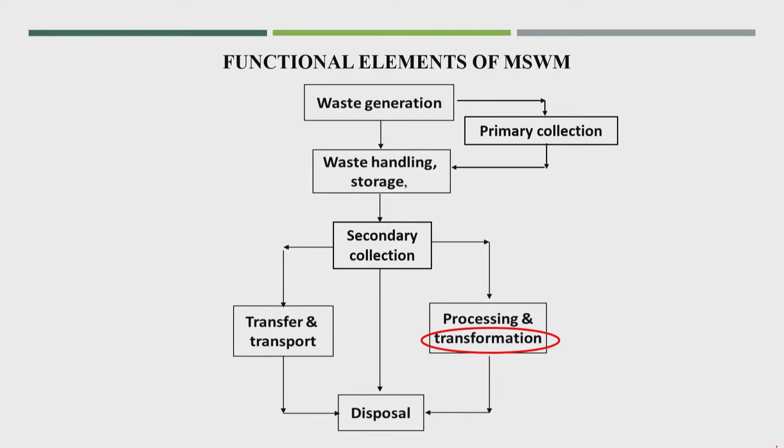Hello student, we are at module 8, chemical transformation, the fifth functional element. In the previous class I talked about whether waste could be useful as fuel, depending on different parameters, especially calorific value.

Today we will talk about incineration, a proper combustion process. Incineration is a waste treatment process that involves combustion of waste at very high temperature in the presence of oxygen. We can call it combustion also. It results in the production of ash, a solid residue produced after combustion. Flue gases are also produced, which are very polluted gases, and along with that, heat also gets produced from the incineration process.

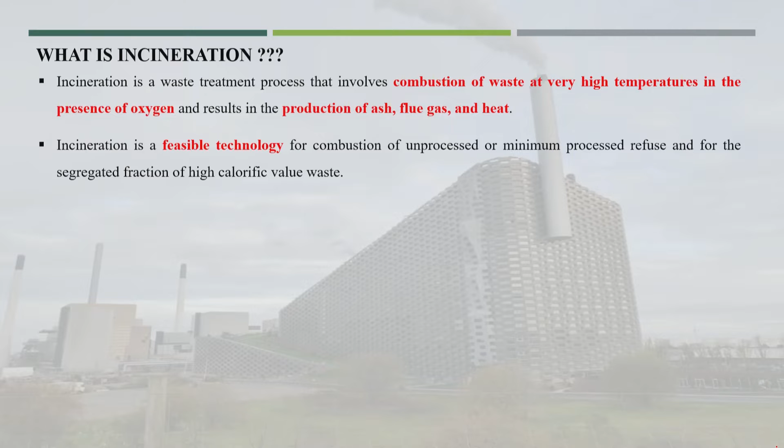Incineration is a feasible technology for combustion of segregated waste, as I told in the previous class. If waste is segregated at source, the dry percentage is very good for incineration, especially paper and plastic, which are highly combustible and have very high calorific value. This is one of the best technologies to reduce volume, because the ash produced is very low, maximum 5 to 10%. So volume reduction of 90 to 95% is possible with this technology.

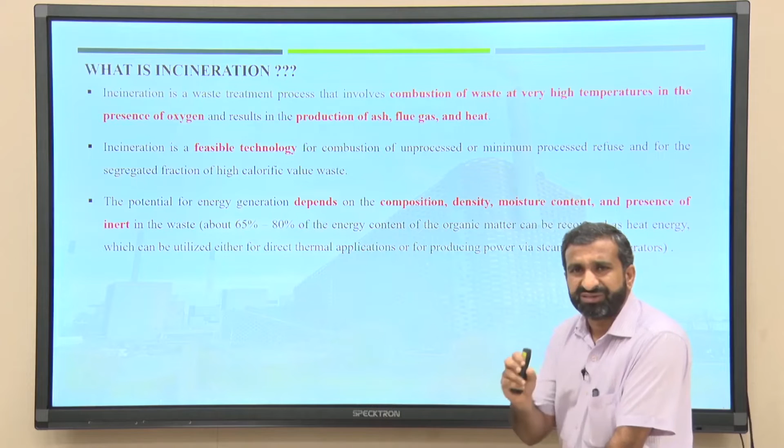The potential for energy generation, because the heat can be converted into power, depends on composition, density, moisture content and other parameters, especially volatile solids. If more organic content or volatile solids are present, energy production will be very high. About 65 to 80% of the energy content of organic matter can be recovered as heat energy from the incineration process, which can directly be used as thermal application for producing power via steam turbine generators.

So I will talk about that. We will get three different products: heat will be the first product, from that we can produce steam, and from that we can produce power.

As I was talking about, incineration helps reduce landfill volume. The volume reduction is more in this case, so whatever waste reaches the disposal or landfill site, that landfill site can work for a longer time.

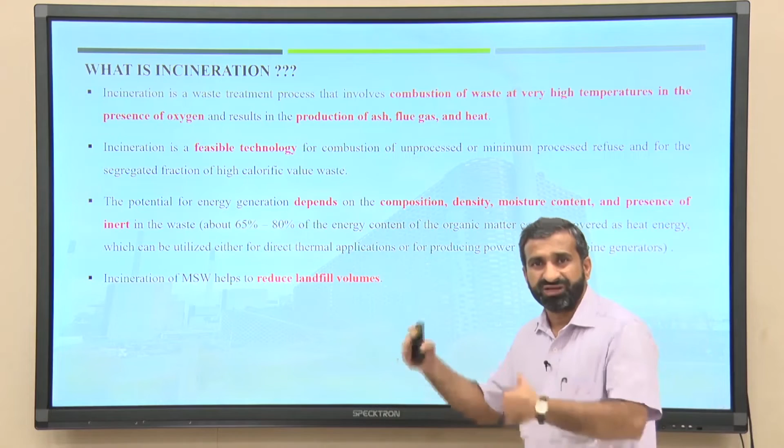Incineration is feasible when there are no better options for processing waste, or there is a shortage of land for landfilling. This is a very important point. If there is no better option available... what could be the better option for dry, combustible waste? The better option is recycling, which we talked about in the last module. Recycling is better because there's no need to worry about flue gas or ash production, and we don't need much energy. There's no need for the very high temperature combustion process required in incineration. Reuse could also be a better option for some materials.

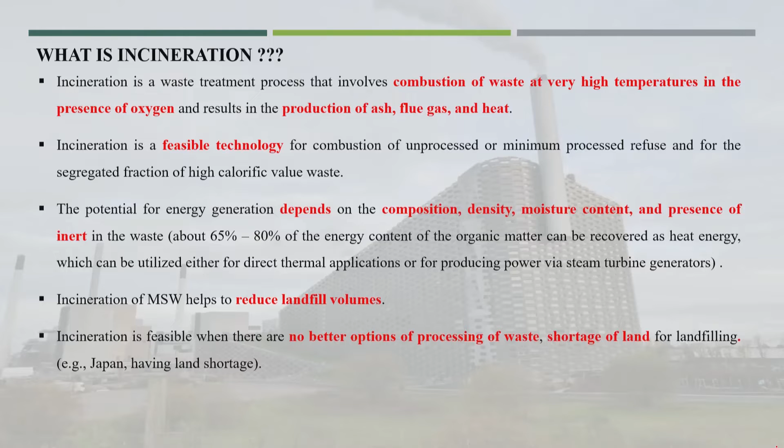If those kinds of options are not available, then incineration is one of the very important technologies or better options, especially where there is a shortage of land. For example, Japan is a very small country with very low land availability. Such countries cannot depend on landfilling for this kind of waste, so this technology is a better option for such countries.

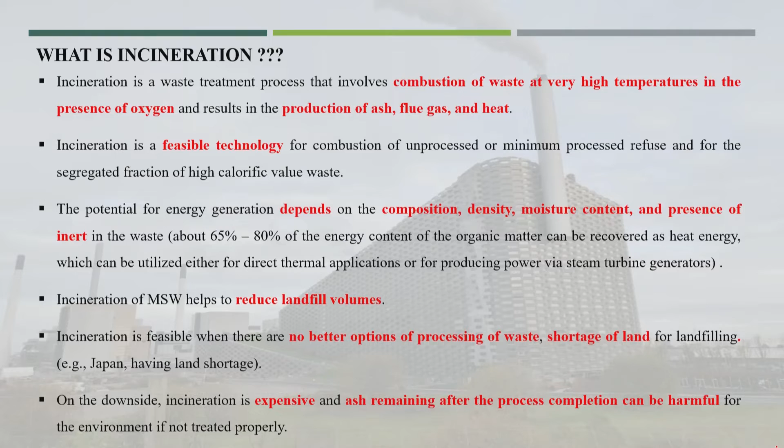On the downside, incineration is an expensive process, and the ash remaining after the process can be harmful. Not only the ash, but also the flue gas produced. We need a lot of treatment processes to treat both the ash and the flue gas generated during the incineration process.

Now, what exactly is the incineration process? In brief, in the furnace the combustible components react with oxygen in the combustion air, releasing a significant amount of hot combustion gas. That combustion gas is normally called flue gas.

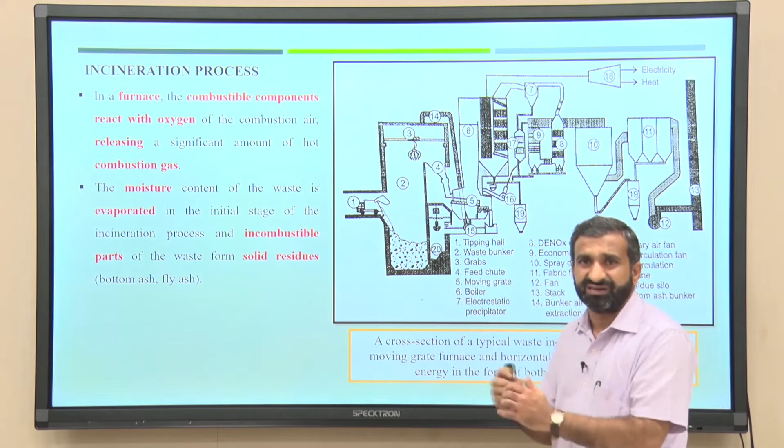The moisture content of the waste is evaporated in the initial stage of the incineration process, and then the combustible matter gets combusted. The furnace is designed so that when waste is received, first the moisture gets removed and then the combustion process starts, producing ash. Incombustible matter may also come out as solid residue.

Through incineration, the solid constituents of the waste undergo a range of processes as a result of exposure to heat and contact with combustion air. So whatever dry matter is put into the incineration process or furnace will go through a range of combustion processes.

Then the combustion gas passes from the furnace to the after-burning chamber. There it undergoes the after burning process, producing heat, which is converted into steam, and from that steam we can produce power.

In the European Union, the minimum temperature is 850 degree centigrade for municipal waste and 1100 degree centigrade for certain types of hazardous waste, for the complete burnout of the combustion gases in the after burning chamber.

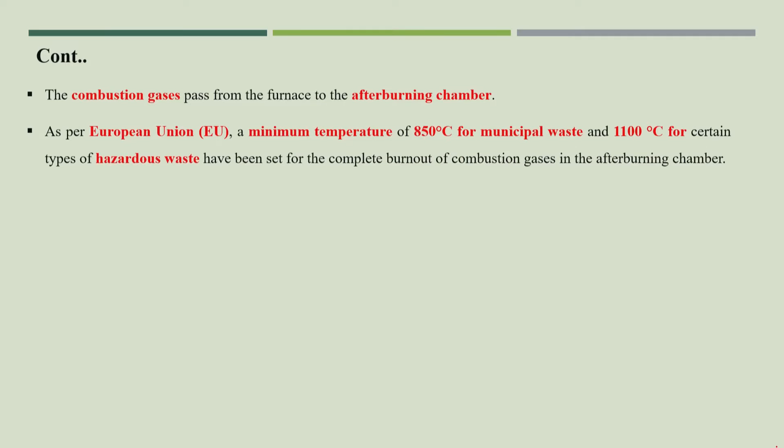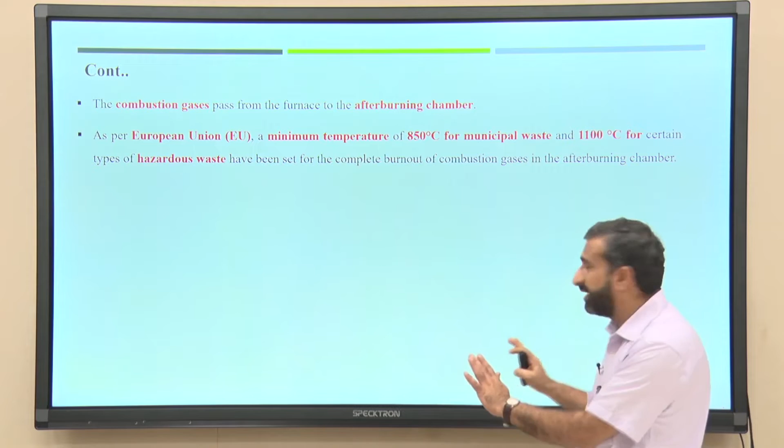The European Union was the first to finalize the temperature of 850 degree centigrade in the first furnace chamber, and for the after burning process of the combustion gas, the temperature was finalized at 1100 degree centigrade. This temperature should be maintained for a minimum time of 2 seconds as measured from the last injection of combustion air. That was the first time the European Union came up with such standardization of furnace temperature.

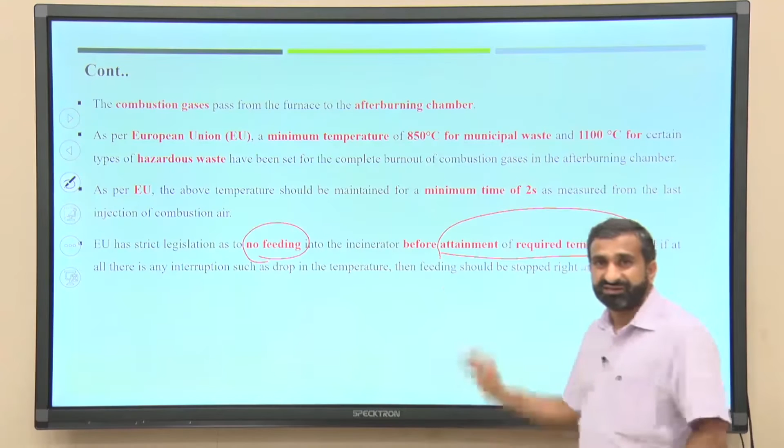A lot of countries, like India, also came up with similar legislation. The EU has strict legislation that there should be no feeding into the incinerator before attainment of the required temperature. That is very important - if we are not reaching 850 degree centigrade, we can't feed that kind of waste into the furnace process.

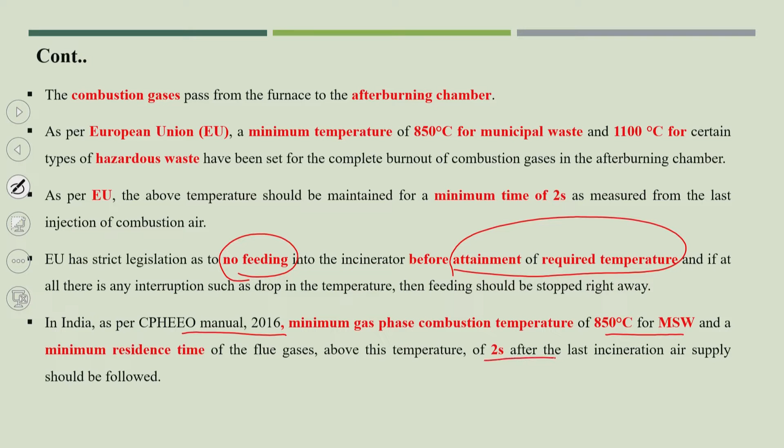Now, with the Solid Waste Manual 2016, India has also come up with this kind of standardization. The minimum gas phase combustion temperature is the same, 850 degree centigrade for MSW, and the minimum residence time of the flue gas above that temperature is 2 seconds after the last incineration air supply, which should be followed.

I will give a few more standardizations or suggestions from the Solid Waste Manual of 2016, for those trying to install incineration plants in India, especially for MSW.

Before going into the incineration process, I thought to show you some brief history about it. The first incineration was developed in the UK in the 19th century - a very old method, because the problem especially in European countries, and especially the UK, was that land availability was very low, and they had started industrialization 100 years before.

These industries did not have a proper treatment process for their solid residues, nor for polluted wastewater, nor for solids. So most of the waste, they were able to combust it. That was the idea behind starting incineration in the 19th century in the European countries.

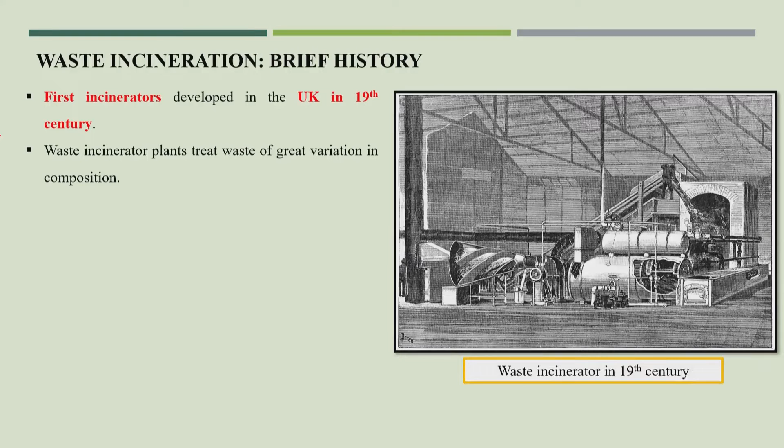Waste incineration plants treat waste of great variation in composition. Obviously, in those days, 100 or 50 years before, in European countries the compositions also used to have large variation.

This is one of the technologies of the incineration process. We are also going to talk about moving grate technology, which was developed in the 1920s and 30s and developed as a combination of grate with rotary kiln. This is another technology - normally we can find this rotary kiln after the moving grate technology. So both technologies together, which I am also going to talk about in the next lecture.

This is very old technology. The idea of sharing this brief history is because we have a lot of literature available. More literature means we have a lot of data available with us. Wherever you are planning to have incineration facilities, if that kind of data and literature is available, it becomes easy to install the incineration facilities in any country. And this is one of the flue gas treatment technologies, the electrostatic precipitator.

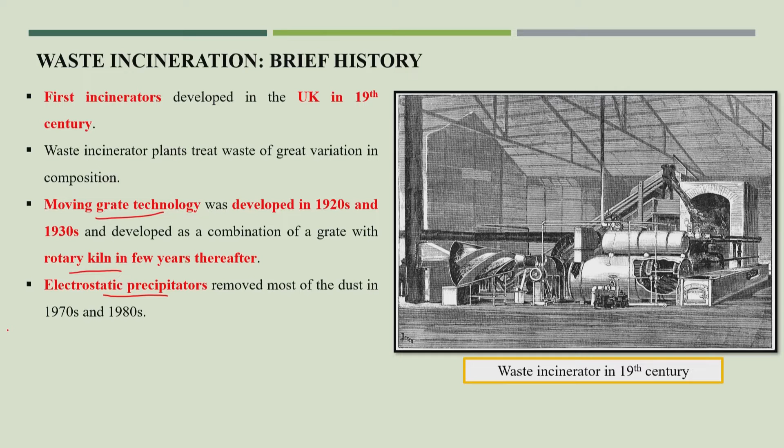I will also talk about this in the next lecture when we discuss the cleaning or treatment of flue gases. This technology started in the 1920s and 30s, and came up further in the 1970s and 80s. Until then, there was no proper treatment. This is one of the very important technologies to treat the solid concentration in the flue gas, especially the dust. Even very small particles of dust can be removed from the flue gas, which is at a very high temperature, going up to 800, 600 degrees, and the dust is removed by this kind of technology.

In 1989, the European Union came up with a directive, which I showed in the last slide, requiring 850 degree centigrade with 2 second residence time.

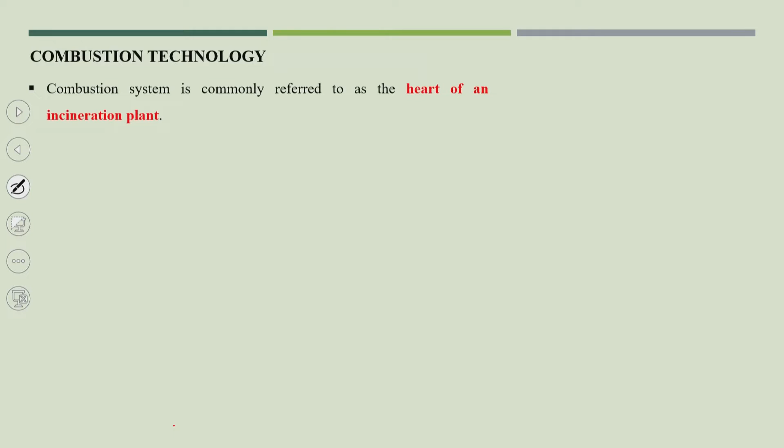Now we will talk about the combustion technology. The combustion system is commonly referred to as the heart of an incineration plant. This combustion system can be classified into two different types.

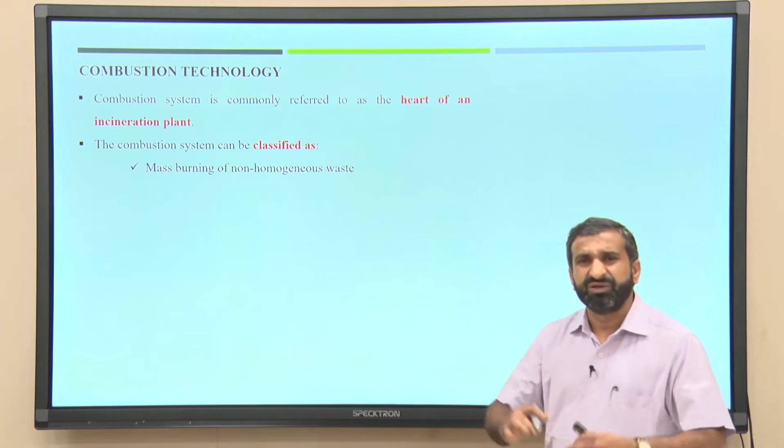First is the mass burning of non-homogeneous waste. This is simple combustion, mass burning, complete burning, especially for non-homogeneous waste. In developing countries like India, we get a lot of non-homogeneous kind of waste, meaning a lot of heterogeneity in the waste. So such kind of combustion system could be possible to use in our country.

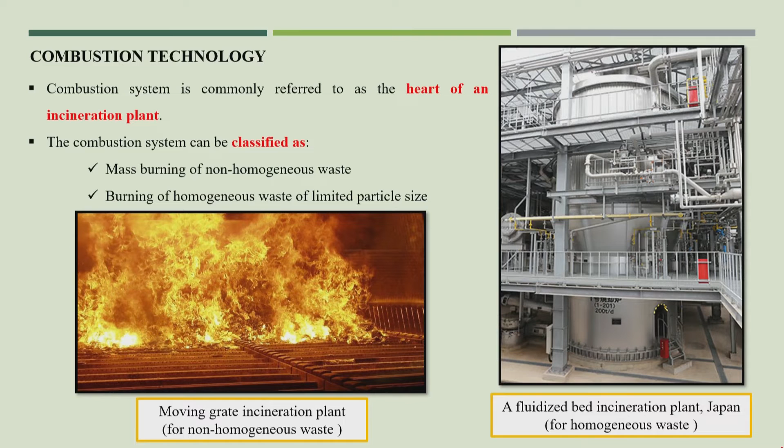This is moving grate technology. Another is the burning of homogeneous waste of limited particle size, which is another technology we are going to talk about: the fluidized bed incineration plant. This is specially for homogeneous waste where a particular particle size is required. Normally this technology is not that beneficial for MSW, but if we are planning for special kinds of waste like sewage sludge, or even plastic alone, such kind of technology could be possible to use.

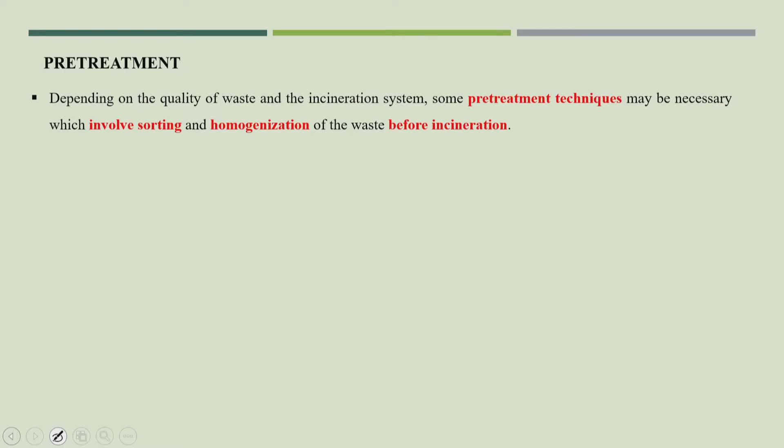Before incineration, especially in India, we require pre-treatment of waste, or pre-treatment of the dry components of the waste. Depending on the quality of waste and the incineration system, some pre-treatment technology may be necessary, which involves sorting and homogenization of the waste before incineration. The idea behind pre-treatment is that sorting removes contaminants or non-combustible matter from the material, trying to homogenize it, at least in size if not in type or composition, so that combustion will be somewhat more beneficial.

For mass burning incineration technology, the pre-treatments include removal or shredding of bulky or heavy items. Large size items are difficult to get completely burned out in the furnace, so these bulky or heavy items will be removed, along with mixing of low and high heating value waste. This is also a very important idea.

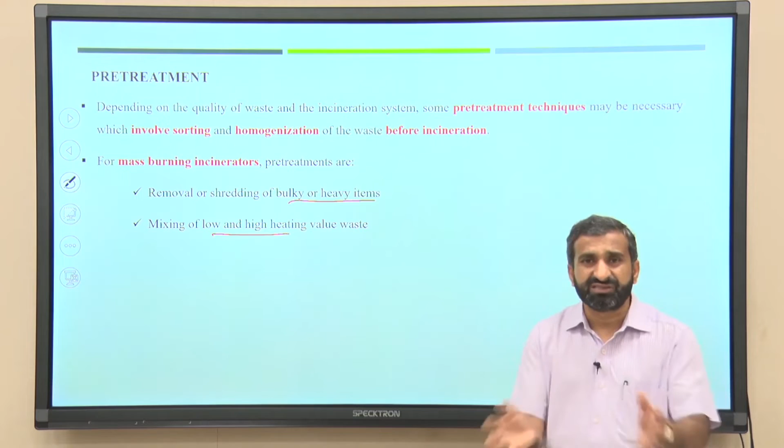If you see that waste is collected from different locations in the city, different vehicles come to the incineration facility. It is possible that sometimes a vehicle comes with low calorific value waste, and sometimes very high calorific value waste comes to the facility. So it is a very good idea to mix both kinds of waste, so we get proper temperature in the furnace, maintaining the standard temperature of 850 degrees centigrade.

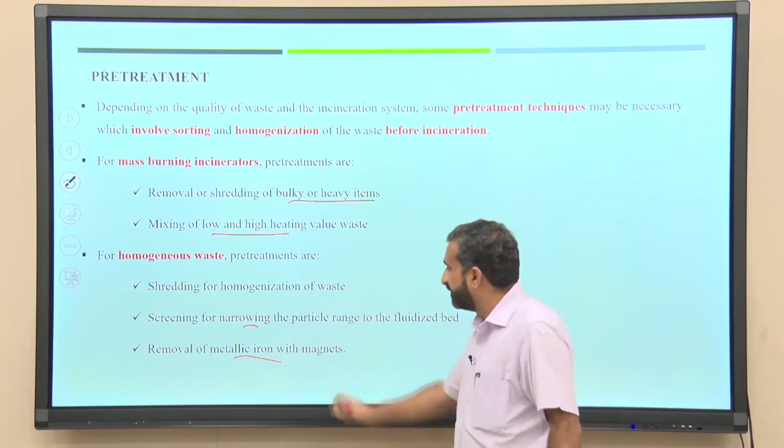For homogeneous waste, pre-treatments are required for the second combustion system facility. The pre-treatments include shredding for homogenization of waste, screening for narrowing the particle range to the fluidized bed, meaning small size making for the fluidized bed technology, and removal of metallic iron with magnet. Metal and glass also have to be removed from this technology. In mass burning incineration, metal or glass items are not sorted out; those non-combustible items come out into the solid residue, but that will not create any problem into the furnace.

Now we will go for types of incineration. There are three different types of incineration. First is the moving grate incinerator. This is a very simple incineration facility and a very well-known technology. A similar kind of technology can be found in coal power plants as well.

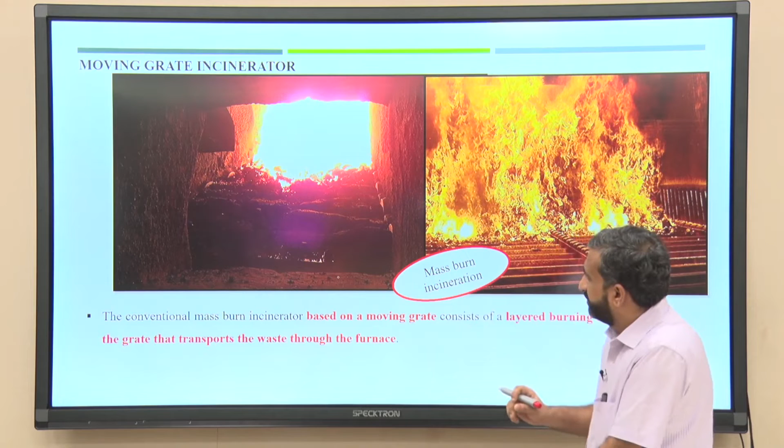Inside the furnace you will find the grate. I will show you some photographs and pictures of the grate so you can understand. The conventional mass burn incineration based on the moving grate consists of a layered burning of the waste on the grate that transports the waste through a furnace. So the combustion occurs on the grate, and then this grate transports the waste through the furnace for the entire process.

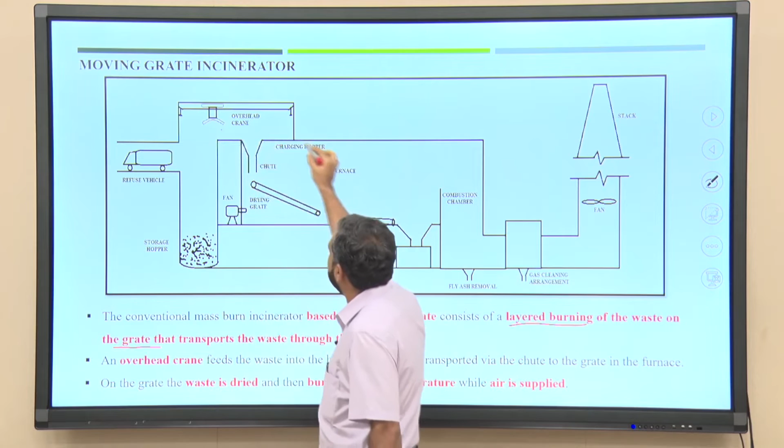Now, this is the line diagram. You can see solid refuse coming to the storage hopper, with an overhead crane. Through this crane the waste is fed into the incineration furnace facility. This is the furnace and these are the grates, one grate and another grate. This is for drying, and a fan is provided at the bottom of the grate so that air could supply into the furnace.

Here waste is getting combusted, and finally this solid residue comes up. This is the second combustion chamber, where whatever combustion gases are produced get combusted. After the second combustion chamber, the gas goes through the gas cleaning arrangement, here the flue gas treatment facilities, and finally it goes to the atmosphere through the stack.

The overhead crane feeds the waste into the hopper, where it is transported via the chute to the grate into the furnace. On the grate the waste is dried and then burned at high temperature while air is supplied. The ash, including non-combustible waste fraction, leaves the grate via the ash chute as slag or bottom ash. This is the bottom ash. This is another ash, very small particle size, that is also produced through the grate.

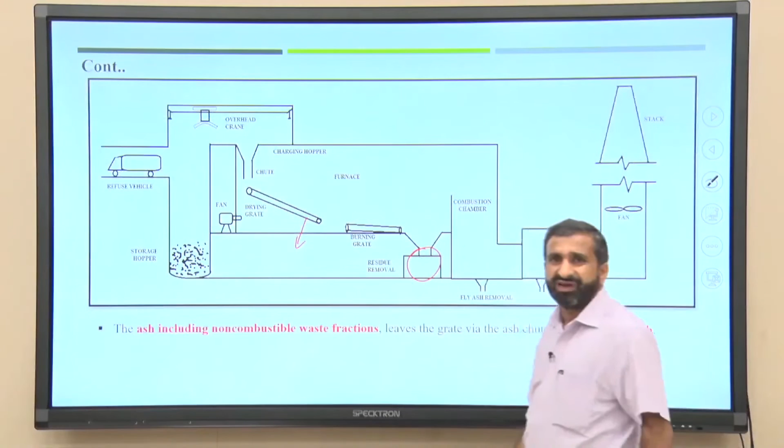Once we talk about the solid residue, I will explain properly. Even in the flue gas cleaning treatment facility, a lot of fly ash gets produced in these treatment facilities.

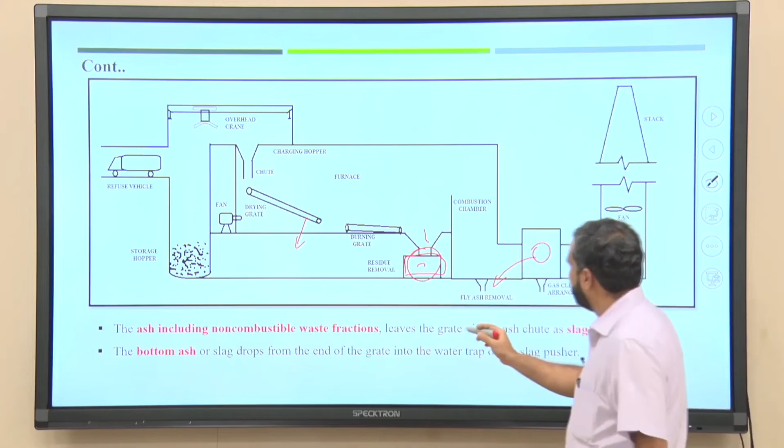The bottom ash or slag drops from the end of the grate into the water trap of the slag pusher. This is a slag pusher, a simple water tank. Whatever bottom ash is produced goes into the water, because it is a very fine particle, for storage. From that, the slag pusher removes the tank once it gets filled up completely. Then another tank is provided in the same facility. The slag is cooled by contact with water, and a large piston pushes the slag to the conveying system.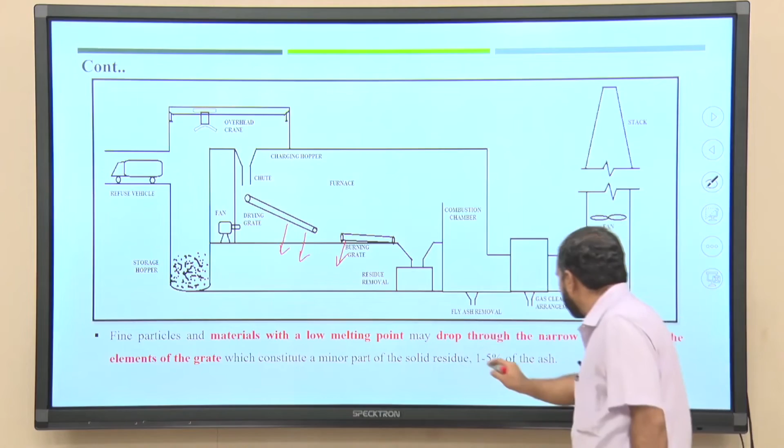The amount of slag, the bottom ash, is usually 10 to 25% by weight of the waste feed depending on the waste composition. Fine particle materials with low melting point may drop through the narrow gaps between the elements of the grate, also producing very fine ash, about 1 to 5% of the total amount of ash production. The flue gas from the furnace consists of a minor part of the ash as well, with fly ash generated from this flue gas constituting about 5 to 10% of the total ash content.

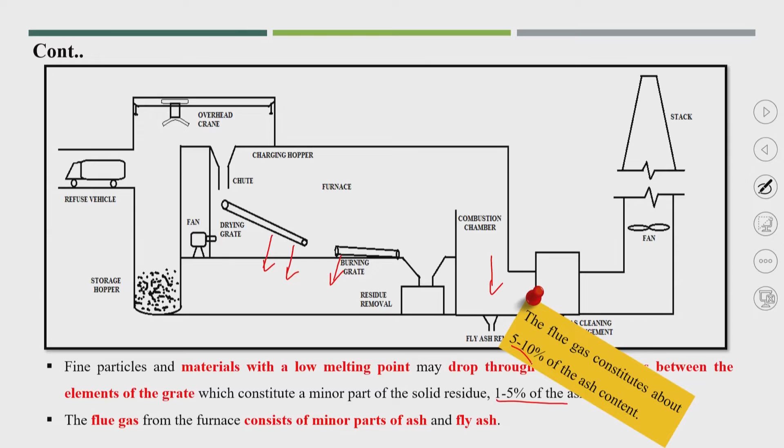Now, what are the advantages and disadvantages of the moving grate system? The advantage is it can accommodate large variation in the waste composition and in heating value.

So, what I was sharing about this technology is highly beneficial for the large variation of the waste composition, also variation in the heating value, and different calorific value mixes could be possible to get combusted into this technology, and can be built in a large unit, up to 50 tons per hour capacity.

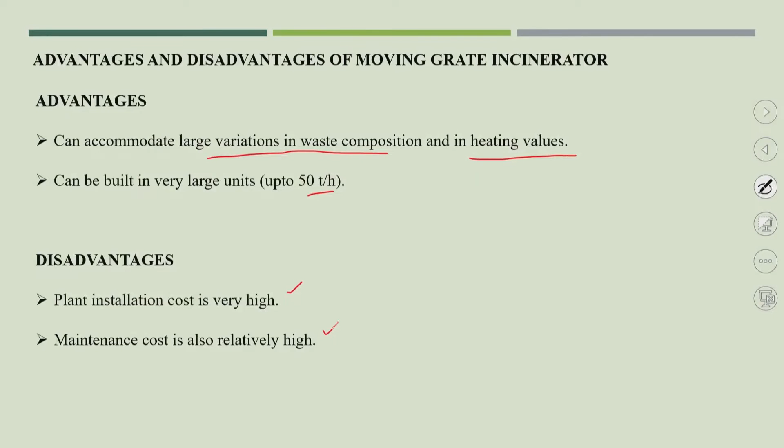This technology is very well known in coal power plants. Another advantage is that a lot of literature is available, and a number of countries have installed this kind of technology. So when any new country like India is trying to have such incineration facility, we can get a lot of literature, especially looking at the failures of such facilities. The disadvantage is that plant installation cost is very high and maintenance cost is also relatively high. That is the major problem of these technologies.

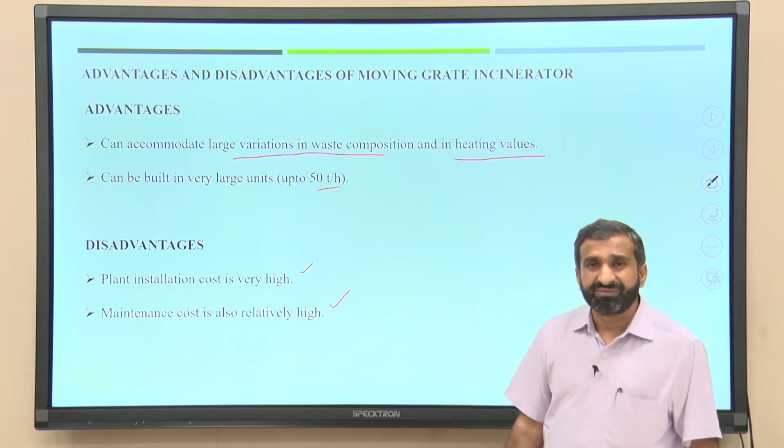All incineration or combustion facilities require a lot of money, not only for capital cost, but maintenance cost is also very high. Because of that, if you are planning for an incineration facility without planning to get any power production or other product from it, it will be a very costly process. So in most cases, countries try incineration not only for volume reduction, but also to get some kind of product out of it. This product could be heat, steam, or power. From that we can at least recover maintenance cost by selling such products.

Now, the next technology is rotary kiln incineration. So you see here, this is the rotary kiln, and finally, after incineration, bottom ash is produced and the flue gas comes out.

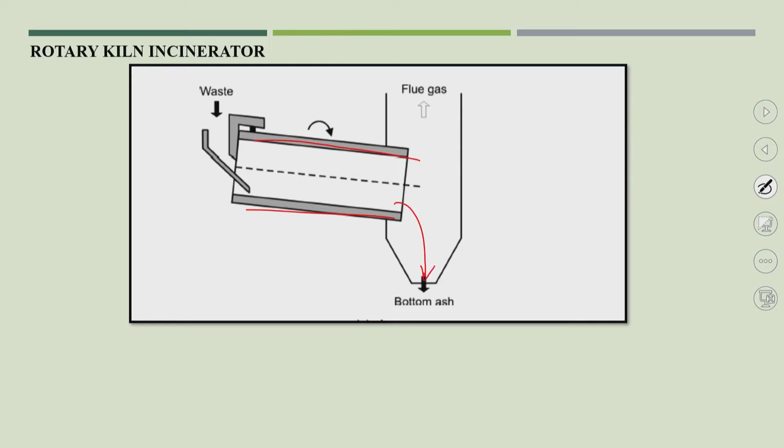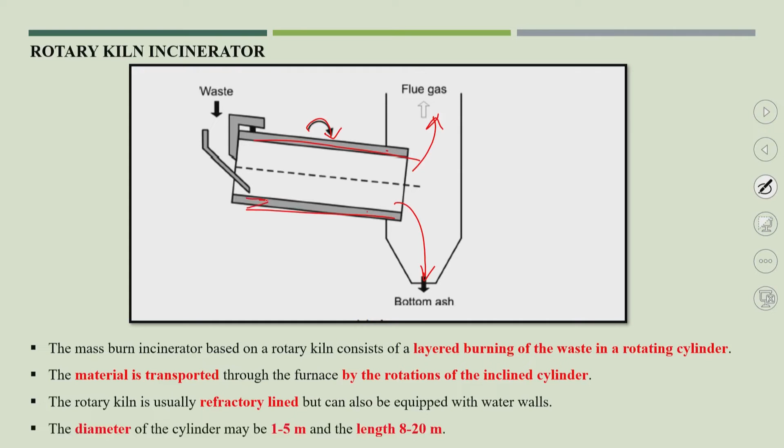The mass burning incineration based on the rotary kiln consists of a layered burning of waste in a rotating cylinder. The material is transported through a furnace by the rotation of the inclined cylinder. So this cylinder is getting rotated. The rotary kiln is usually refractory lined, but can also be equipped with water walls - so these are the refractories or water walls. The diameter of the cylinder may be 1 to 5 meters and the length could be 8 to 20 meters.

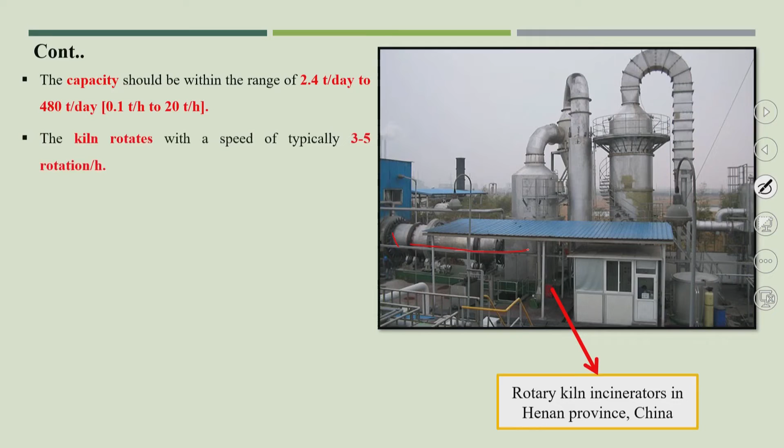So this is one of the rotary kilns, you can see here. The capacity would be within the range of 2.4 tons per day to 480 tons per day, or 0.1 tons per hour to 20 tons per hour waste production. The kiln rotates with a speed of typically 3 to 5 rotations per hour - the rotation is not that fast. The excess air ratio is well above that of moving grate incineration and the fluidized bed.

The fluidized bed incineration is a third type of incineration. The excess air ratio required means more amount of air will be supplied for the combustion process. This is another incineration facility, this one is from China. For the rotary kiln combustion facility, the energy efficiency does not exceed 80%, which is okay but still acceptable.

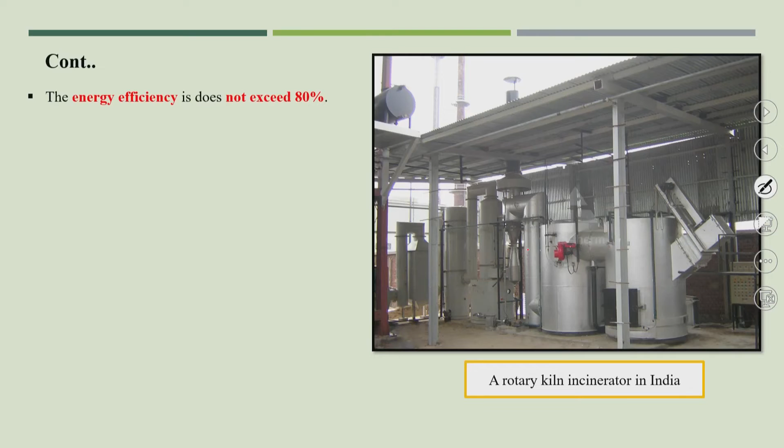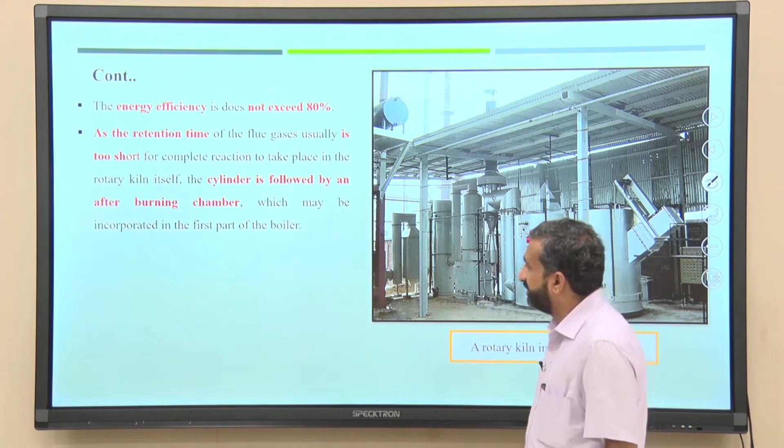As the retention time of the flue gas is usually too short for complete reaction to take place in the rotary kiln itself, the cylinder is followed by an after-burning chamber which may be incorporated in the first part of the boiler. This is a very important point for the rotary kiln, because the retention time of waste in the rotary cylinder is short for complete combustion of the entire waste. So providing some after-burning chamber is more beneficial.

Because of that, the rotary kiln may be used in combination with the moving grate, where the moving grate forms the ignition part and the rotary kiln forms the burning out section. I think this is one of the very good ideas - combination of the two technologies.

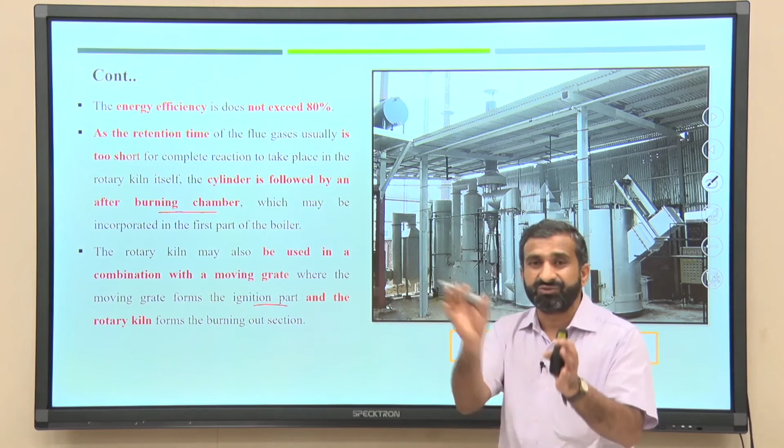The first technology handles the initial combustion or incineration of the solid material inside the moving grate furnace, and whatever combustible gas is coming out gets combusted into the rotary kiln. In the moving grate, a second combustion chamber is also required - this combustion chamber could be a rotary kiln system.

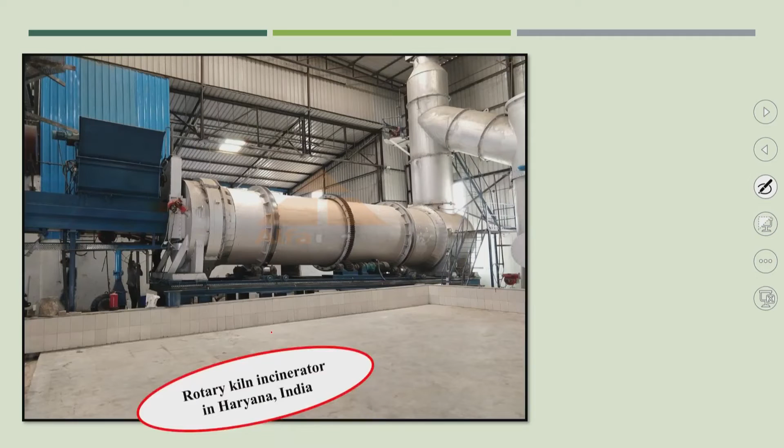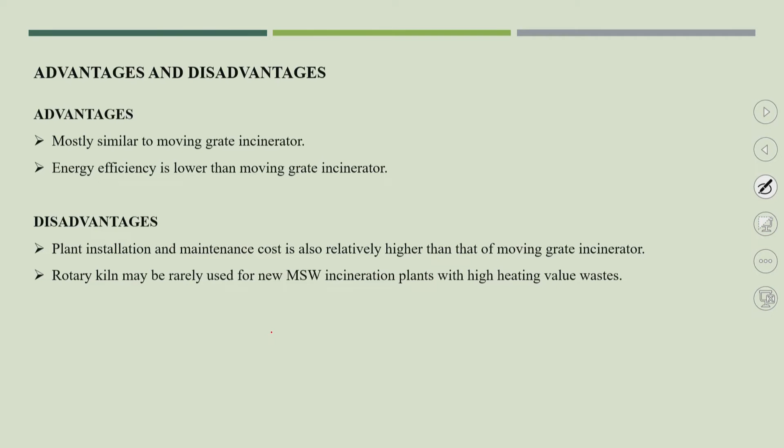Now, advantages and disadvantages. Advantages are mostly similar to the moving grate incineration, though energy efficiency is somewhat lower. Disadvantage is the same as the moving grate system - installation and maintenance cost is relatively higher, and rotary kiln may be rarely used for new MSW incineration plants with high heating value waste. I think this kind of rotary kiln is good to use as a second combustion chamber for the combustion air, which will have low heating value.

Now, next is the fluidized bed incineration. As the name suggests, fluidized bed - inside the incineration there will be a bed which gets fluidized and the entire waste also in the fluidized condition. So, here is the line diagram of that. First I will explain the line diagram.

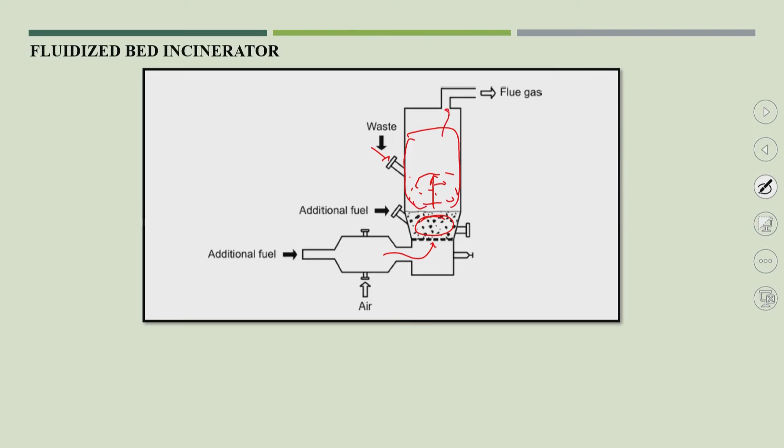So, here waste is getting fed into the vertical chamber. This is the fluidized bed, and from the bottom the air is added, and whatever waste is fed into the chamber will be in the fluidized condition because air is being supplied. So, this is your combustion chamber, and whatever gas comes out, that comes out in flue gas form. There is also a facility for putting additional fuel for the combustion to increase the efficiency of the combustion. The incineration works on the principle where solid particles mixed with the fuel are fluidized by air.

By fluidization, the fuel and solids are suspended in an upward air stream, thereby behaving like a fluid. These entire solids will be suspended in the upward air stream.

The reactor usually consists of a vertical refractory lined steel vessel containing a bed of granular material like silica sand, limestone, or some kind of ceramic materials. This is the bed of granular material.

The fluidization of the bed is ensured by air injection through a large number of nozzles at the bottom of the incineration, causing vigorous agitation of the bed material, in which the incineration of waste takes place in close contact with the bed material and combustion air, allowing relatively low excess air and high thermal efficiency up to 90%. So, here small nozzles are available from which air is supplied, so that the entire solid material will be in a suspended phase - meaning the entire area of the material is available for combustion.

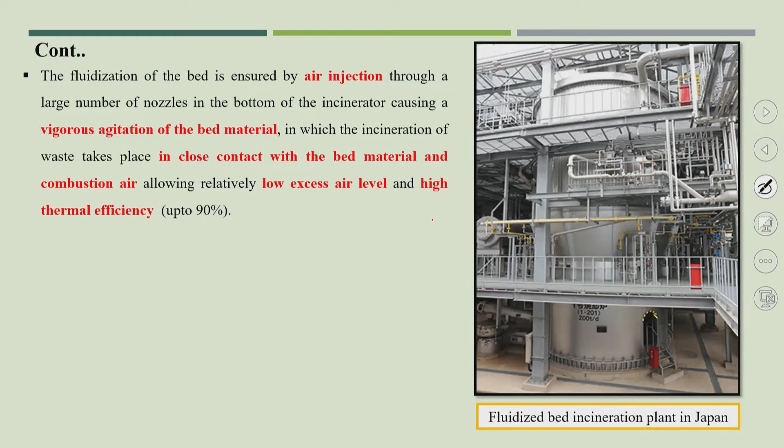I think this kind of technology has never been used for MSW, but for special kinds of material, because this kind of technology requires a very homogeneous kind of material. So, in Japan or USA they use this technology especially for special agricultural residues that are more homogeneous in nature, or in municipal areas for sewage sludge - dry sewage sludge is highly combustible. Because these countries are very developed and have a large number of sewage treatment facilities, a large amount of sewage sludge is getting produced, so this kind of technology is very useful, because that material should be fluidized with the air.

So understand that this kind of technology cannot be used for very large particles, and heavy particles also cannot be put into such combustion facilities.

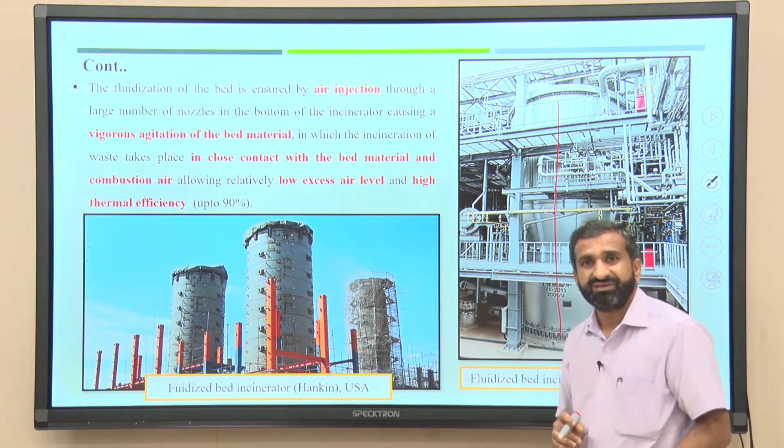Now advantages - there are a lot of advantages of this technology, I think it is noted especially for NOx generation like NO2, NO3 or NO production, which is low as compared to both other technologies. That is the major problem with the moving grate and rotary kiln facility, and even capital and maintenance costs are also relatively low.

And disadvantage - I put it into the disadvantage, but that is a prerequisite of fluidized bed incineration facility - depending pre-treatment is required for smooth functioning. I put it in the disadvantages, but that is a prerequisite for this kind of technology. Primarily useful for homogeneous waste types, which include liquid waste also, because that can also be fluidized into the air.

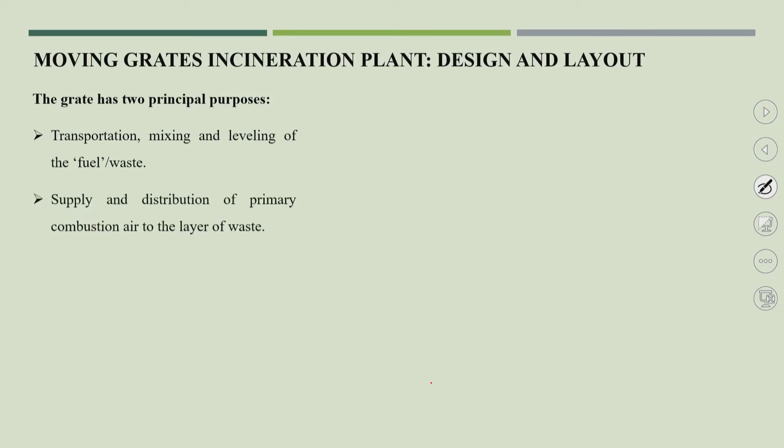Now, moving grates incineration plant design and layout. The grate has two principles - this is the major design idea behind the moving grate incineration facility. The grate has two basic principal purposes: transportation, mixing and leveling of fuel or waste, and supply and distribution of primary combustion air to the layer of waste, so that proper combustion could be possible.

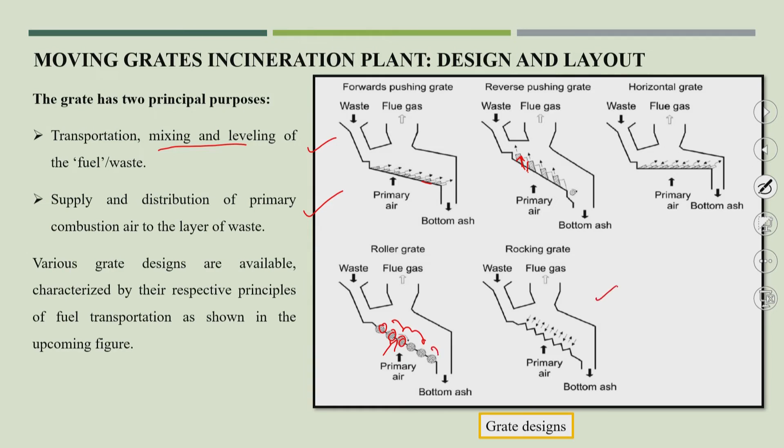Various grate designs are available, characterized by their respective principle of fuel transportation, as shown in this figure. These are the different kinds of moving grates: this is the forward pushing grate, this is a reverse grate going upward, this is fixed, this is horizontal grate, this is roller - here the rollers are there, and primary combustion air is added through small nozzles from the grate, and waste is transported and also combusted. This is another rocking grate. There are different kinds of grates available, and a number of different private companies install combustion facilities using these different kinds of grates.

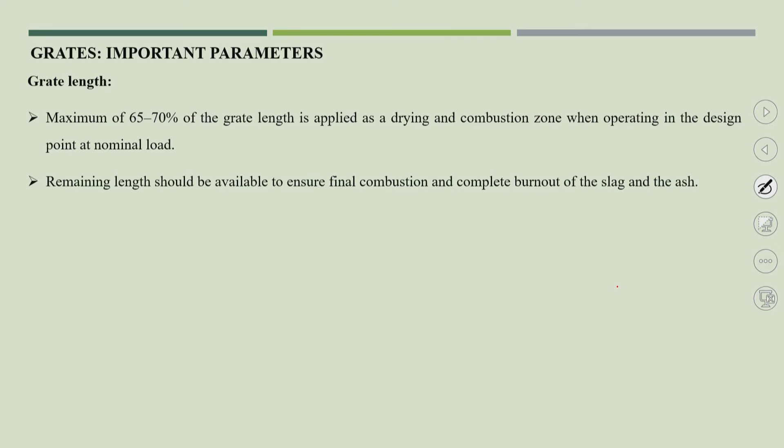Grate important parameter: the grate length. Maximum of 65 to 70% of grate length is applied as a drying and combustion zone when operated at the design point at nominal load. Remaining length should be available to ensure the final combustion and complete burnout of the slag and ash. So 65 to 70%, that means 2/3 of area is required for proper combustion, and the remaining 1/3 area will ensure the final combustion and complete burnout of the remaining material.

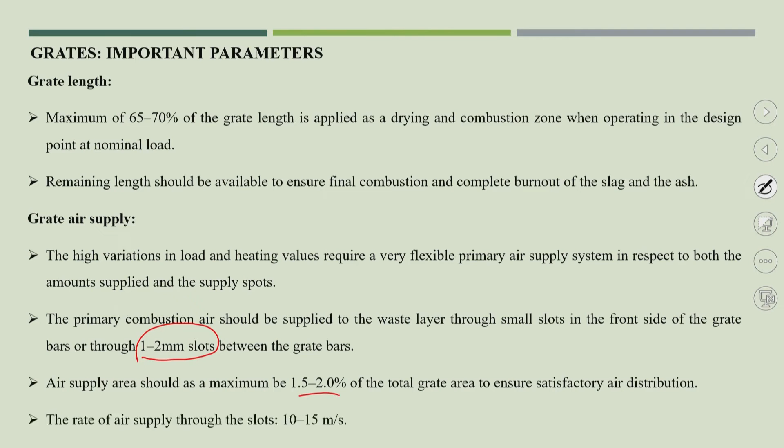Grate air supply: the high variation in load and heating value requires a very flexible primary air supply system, both in amount supplied and supply spots. The primary combustion air should be supplied to the waste layer through small slots in the front side of the grate bars, with a slot size of 1 to 2 mm between the grate bars. The air supply area should be a maximum of 1.5 to 2% of the total grate area to ensure satisfactory air distribution, and air supply through the slot is at a velocity of 10 to 15 meters per second.

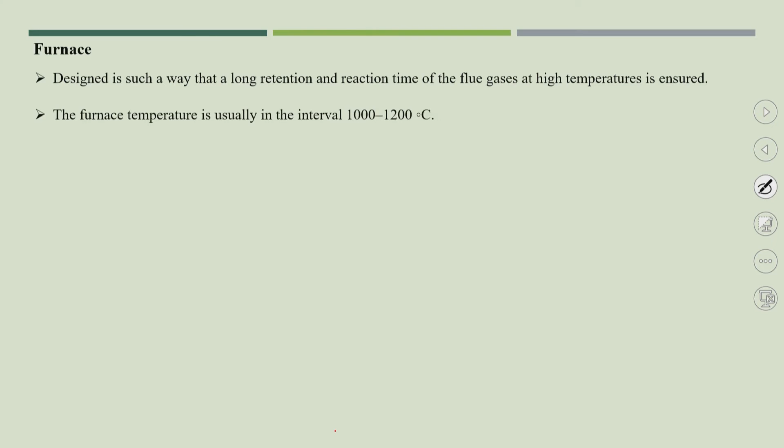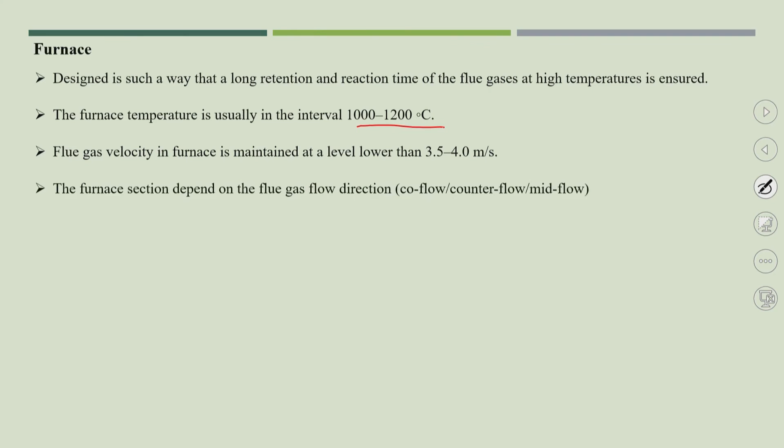Here we are not going to discuss much about the furnace design, because this course is for environmental engineers. So we will just talk about what kind of flue gas will be produced and how best we can treat that particular flue gas.

This is one slide I put specially because many countries are utilizing such a facility, because combustion requires a large amount of primary air. So is it possible that flue gas, since heat is already there in the flue gas, can be used for the primary air - not 100%, but at least 5%, 10%, 50% - this flue gas can be recycled or recirculated into the furnace.

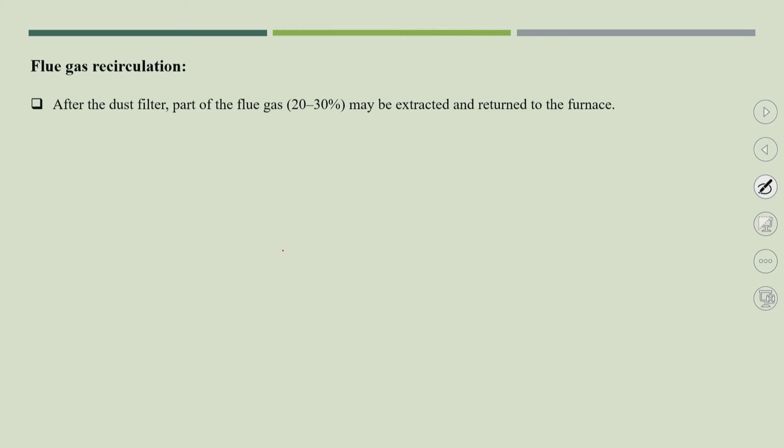After the dust filter, part of the flue gas, about 20 to 30%, may be extracted and returned to the furnace. Flue gas recirculation has economic and environmental advantages. Recirculation of flue gas can lead to higher thermal efficiency, an efficiency gain of 1 to 3% may be achieved, because this flue gas already has a particular temperature. It also reduces NOx formation, which is a very important benefit, 20 to 30% flue gas recirculation can achieve 20 to 40% reduction in NOx formation.

There is also reduction of the amount of flue gas entering the flue gas cleaning system, so the amount reaching the flue gas treatment facility will also get reduced.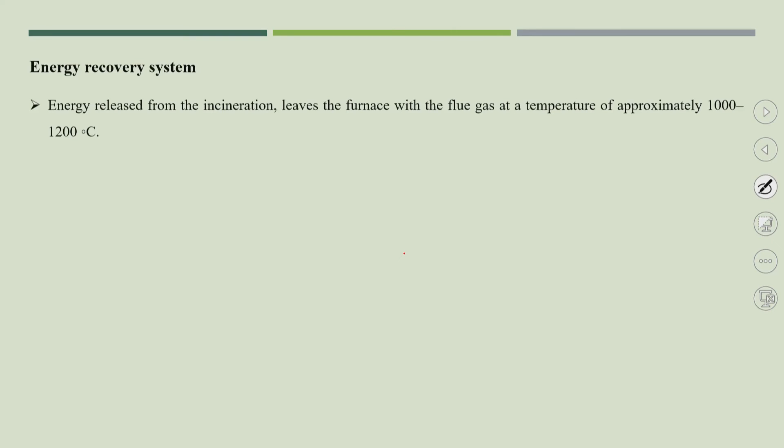Now, the energy recovery system: the energy released from the incineration leaves the furnace with the flue gas at a temperature of approximately 1000 to 1200 degree centigrade. The hot flue gases are cooled using the boiler before passing on to the flue gas cleaning system. In the boiler, the energy released from incineration is recovered as hot water or steam, depending on the type of boiler, and the steam thus could be used to generate power.

So we get three different products: heat gets produced, then steam, hot water or steam, and from this steam we can generate power. So heat, steam and power are three different products that come up. Normally, when people talk about waste to energy, they think energy means power. But that is not the case, energy could be heat, energy could be steam, and energy could be power also.

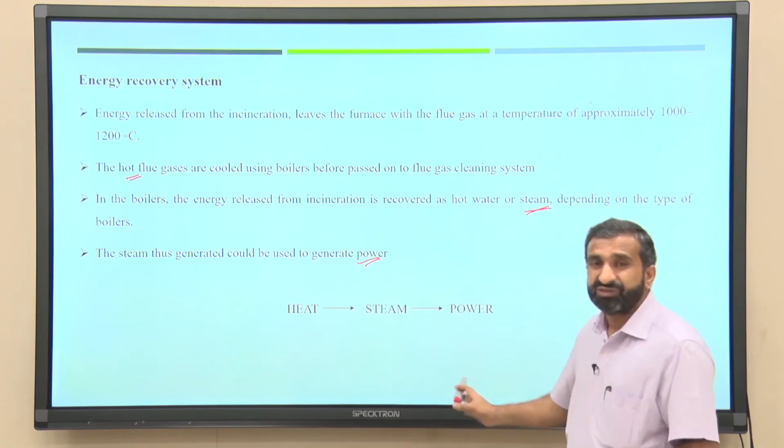There is a possibility that a number of companies, especially food processing industries or metal industries, require a lot of heat, or some industries require steam. So rather than producing power directly, why not supply this heat directly to such industries, and supply the steam to food processing industries which require steam. In developed countries, they installed incineration facilities in locations where such industries are available, rather than for power production, because the efficiency of power production is very low, very poor. So why not supply these two products, either heat or steam, to such industries.

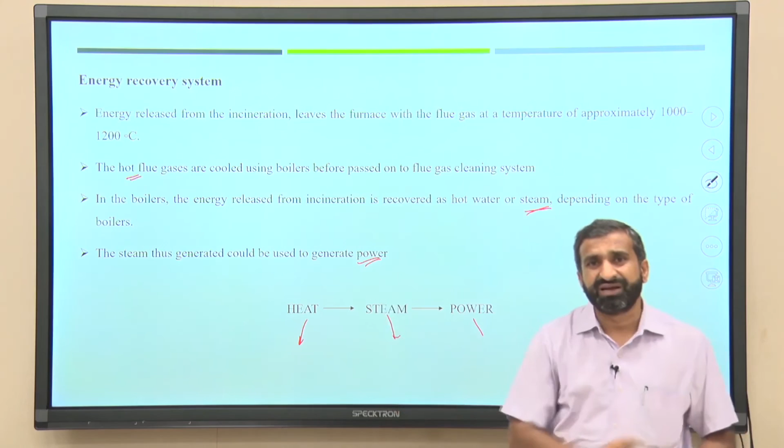This is one very important table which summarizes the typical efficiency of different energy recovery systems. Suppose you are planning for power production only from the waste to energy plant or incineration facility, power production recovery is only 25 to 35% efficiency. So you can understand that planning only for power production is not that beneficial. But if you compare with steam and power production, the efficiency goes to 75 to 90%, and especially when planning for heat and power combination, the efficiency could be 80 to 92%. But in this case, power efficiency is still low, while heat efficiency is 60 to 65%.

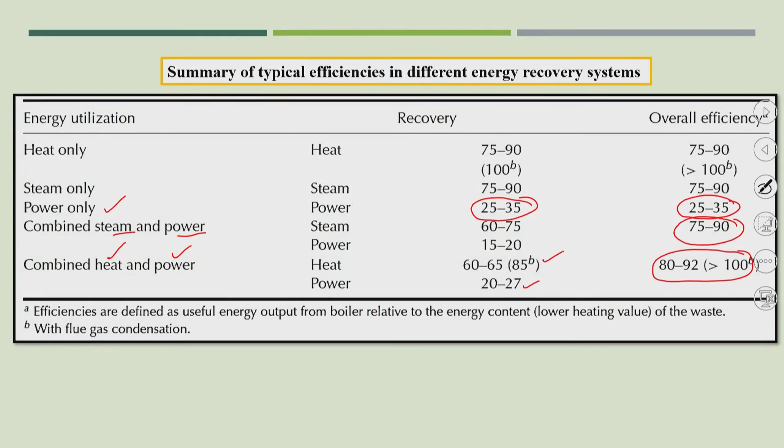So it is always beneficial to plan or install the incineration facility not only for production of power, but also to plan for either steam or heat along with power production.

Here I come up with one slide to explain India's first waste incineration plant. In 1987, the Ministry of Non-Conventional Energy Sources (MNES) commissioned the Timarpur Refuse Incineration cum Power Generation Station in Timarpur, Delhi, at a capital cost of 20 crores. That technology came from Denmark. The plant was designed to incinerate 300 tons of MSW per day to generate 3.75 megawatts of electricity.

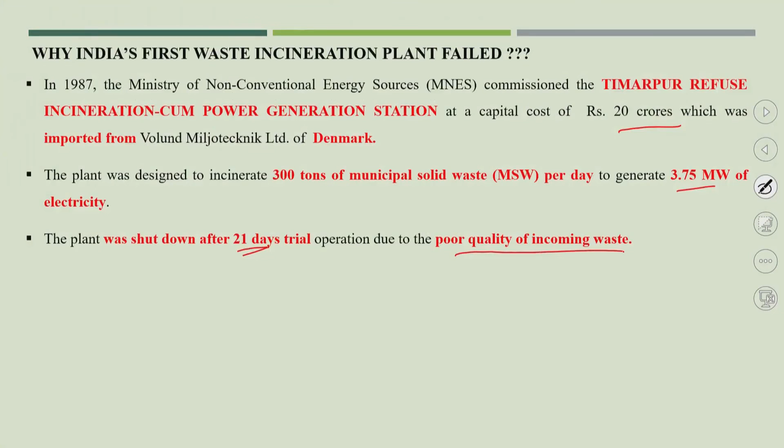The plant was shut down after just 21 days trial. The trial failed, and the complete incineration facility was shut down because of poor quality of incoming waste. In 1987, 1990, even up to 2000, as I showed in previous lectures, the composition of Indian waste was mostly biological in nature.

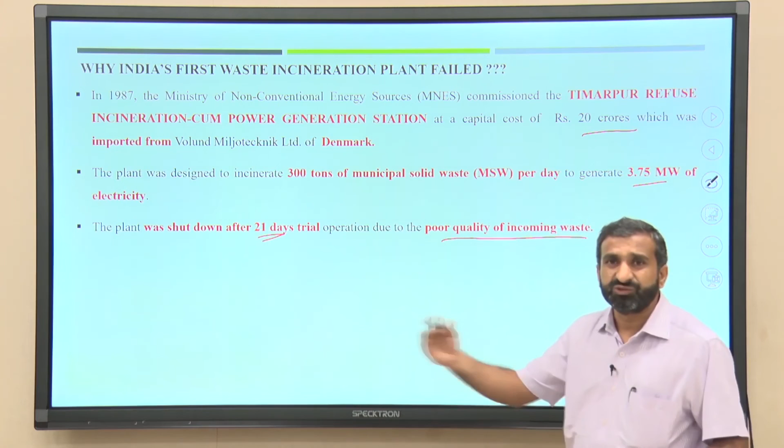In those days, the biological components used to be 60 to 70%, and everything was mixed, there was no segregation, and because of that very poor quality of incoming waste used to be received into this incineration facility. Calorific value of the supplied waste was only 600 to 700 kilocalorie per kg, but the required calorific value was around 1500 kilocalorie per kg. They attempted to supplement the combustion with diesel fuel, and even coal was added to get the proper combustion temperature, but they ended up spending a lot of money on maintenance and running of that particular plant. Finally, the project was officially shut down in July 1990, so within 2-3 years it was completely shut down.

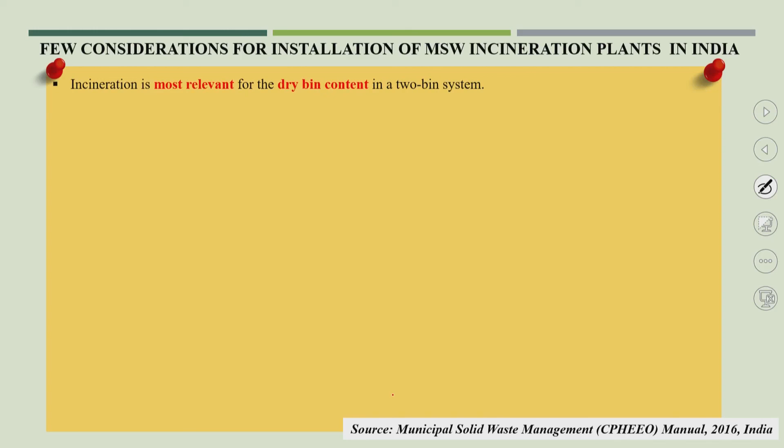So here I come up with 2 slides, the last 2 slides on a few considerations for installation of MSW incineration plants in India. I think incineration is most relevant for the dry bin content in the 2 bin system, that is from the manual 2016. Pre-treatment is necessary for unsegregated waste, but if it is already segregated at source, there is no need of pre-treatment.

Lower calorific value should be 1450 kilocalorie per kg throughout all the seasons, that is an important consideration. So in all the seasons, especially in the rainy season, we also need to have this kind of lower calorific value, or net calorific value. Annual average must not be less than 1700 kilocalorie per kg.

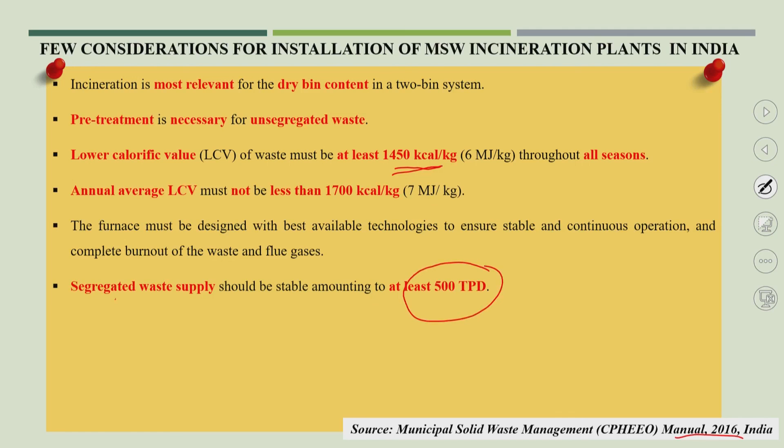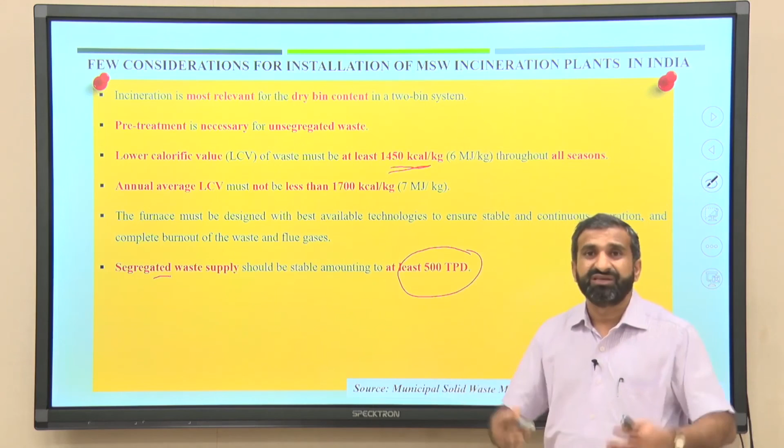The furnace must be designed with best available technology to ensure stable continuous operation and complete burnout of the waste and flue gas. Segregated waste supply should be a stable amount, at least 500 tons per day capacity. Only cities having a large amount of waste generation, suppose cities like Kolkata, Delhi, Mumbai, Hyderabad, Bangalore, Jaipur, such cities which are producing 2000 tons per day waste or more, only such cities can come up with such a large incineration facility.

Skilled staff is also required, that is also a very important point. Since capital investment is high, a planning horizon of 25 years operation or more is required before planning for installation of an incineration facility, and a strict monitoring system should be followed, especially for the flue gas monitoring system.

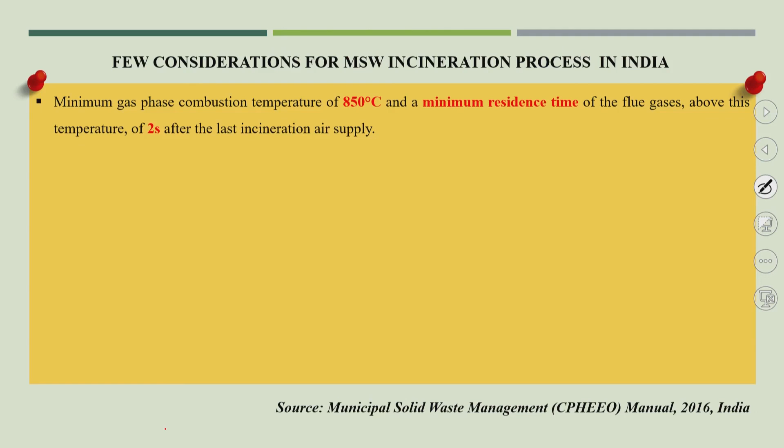A few considerations for MSW operation, once you have installed the incineration plant, what considerations need to be followed: the minimum temperature which I already talked about, 850 degree centigrade with residence time of 2 seconds, and optimum oxygen content should be maintained for the combustion. Carbon monoxide content of flue gas is a key indicator of the quality of combustion, and this is properly monitored.

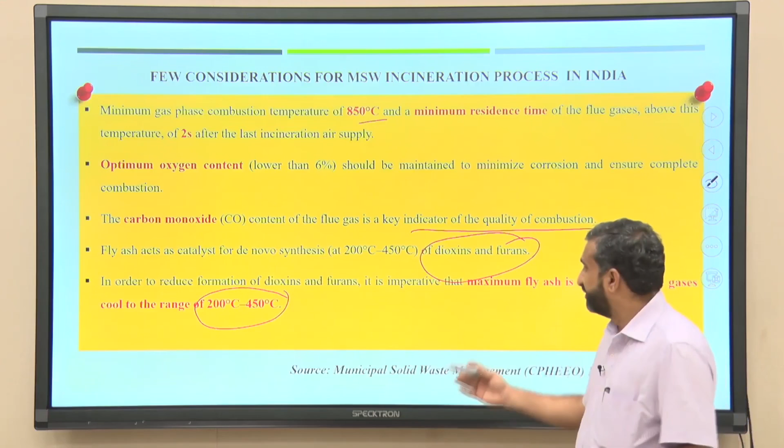The fly ash acts as a catalyst for de novo synthesis of important pollutants, dioxins and furans. That standardization has also been given now in the monitoring system. This has to be monitored, how much production of dioxins and furans there is. In order to reduce the formation of dioxins and furans, the flue gas temperature has to reach about 200 to 450 degree centigrade, meaning cooling of the flue gas is very important for the reduction of dioxins and furans.

So these are a few considerations given in the MSW manual, and here we will finish this lecture.

Now, once you understand the entire incineration facility, there are two major pollutants coming out from incineration which, as an environmental engineer, we need to understand: one is the flue gas and the other is solid residue. So in the next lecture we will go for flue gas treatment, how best we can treat the flue gas, followed by solid residue. Also, in one of the lectures I will talk about a few case studies, so that you people can understand the incineration or chemical transformation of MSW properly.